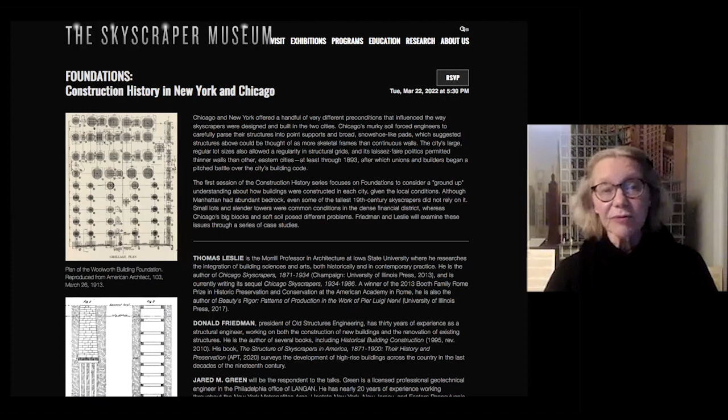Don and Tom will talk in three other sessions on, and I will show you briefly the other topics, frames, facades, fire, and then Alexander Wood will join us for a final kind of case study in this series on the Mills Building in New York, on Broad Street, a building of the 1880s that will show us in action, in the spectrum of that building's construction history, a lot about the environment of construction, the profession of construction as it was being established in the very earliest years of the skyscrapers.

So this series is really meant to be a drill down into topics that we have already, and by we, I mean both the Skyscraper Museum and Don Friedman and Tom Leslie, explored in several other sessions in the museum's history of programming. And I'm going to show you a few slides that will recall some of the genesis of this debate of New York versus Chicago, and the pairing, the kind of mutual affection that you will see in the expertise of both Don and Tom.

Now, in order to make this not just the Don and Tom show for 4 running weeks, we have invited an additional professional expert to be the moderator for the dialogue that happens after the individual city presentation. So tonight that's Jared Green, who is a geotechnical engineer in the Philadelphia office of LANGAN. I will introduce him a little more fully after Tom and Don speak. But first I want to give a little bit of an overview and an introduction to the series.

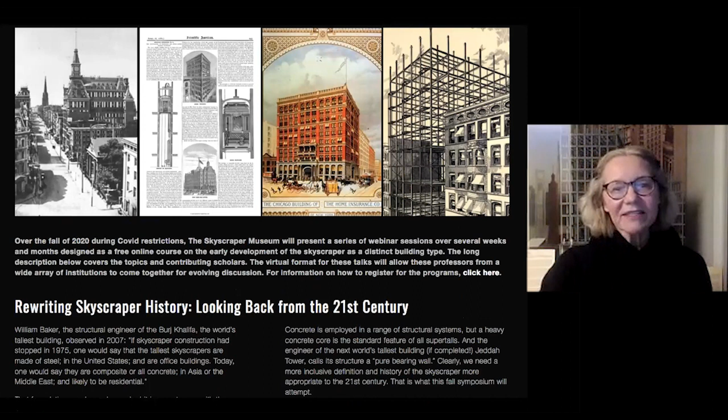And this is a continuation of some of the explorations that we did almost 2 years ago now in a kind of continuing semester symposium by contributing scholars, some of whom will return for this series, called Rewriting Skyscraper History. And that series was a response to the historiography and to the new scholarship that surrounds the skyscraper, but also to a particular lens on skyscraper history that emphasizes firsts.

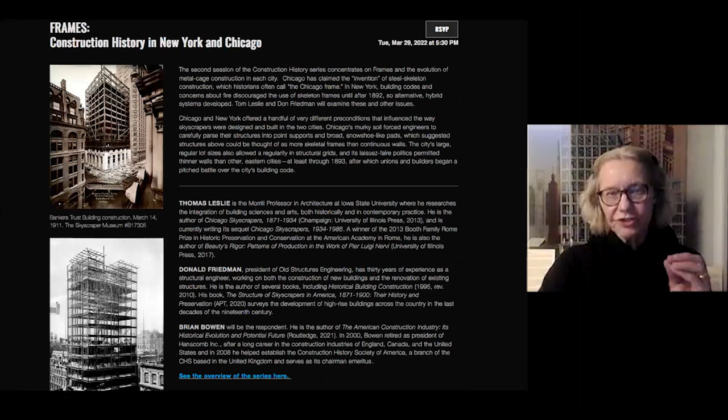I'll talk about that in a moment, but here are just a few screens that feature the first lectures in the series, moving up from foundations to frames, to separate out facades in order to talk about those. And you see at the top of the screen some of these analytical drawings that Tom Leslie has done with his students at Iowa State. And that kind of analysis Tom's going to talk about more over the course of the series.

Tom Leslie is the Morrill Professor at Iowa State University. He has a long history of teaching studio. He worked as an architect before he became a professor, and he has for many years been defining himself as a preeminent historian of the Chicago skyscraper, first with this work that takes the first tranche of the decades 1871 to 1934, and now at work in the sequel to this book, which looks in depth at the post-war period. But I'm going to represent Tom and Don just with a single cover of one of their books, although they have many more to their names, and you can find those on our website.

Donald Friedman is a structural engineer who is the head of his firm, Old Structures, here in New York, where he's practiced for about 30 years. This book, The Structure of Skyscrapers in America, is not only about New York, but he is the defender of and the deep down expert on New York architecture in our dialogue, our kind of binary between New York and Chicago. He is also the author of Historical Building Construction and numerous other works, informed both by his scholarship and by his work on historic structures in the city in his professional life.

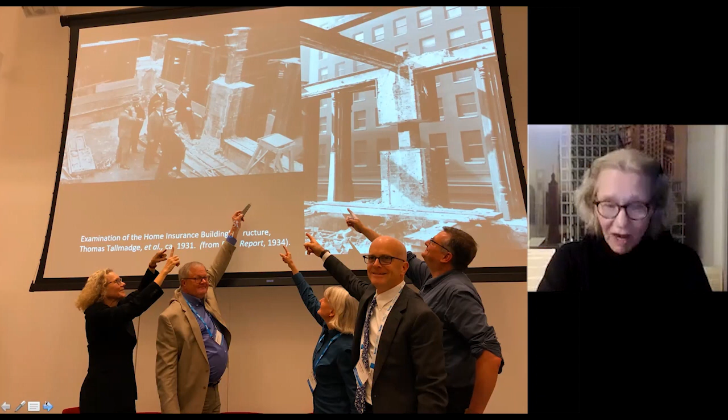These are some of the conspirator historians, with my cursor on Tom Leslie's nose, and there's Don and Gail Fenske and Jerry Larson and me putting the hex sign against the allegation that the first skyscraper was the Home Insurance Building, which was, as you can see in these slides, disproved during the demolition of the building. But it's taken a long time to erase that myth. We'll also address another myth tonight, the bedrock myth, and I think you'll understand why we object to that one as well.

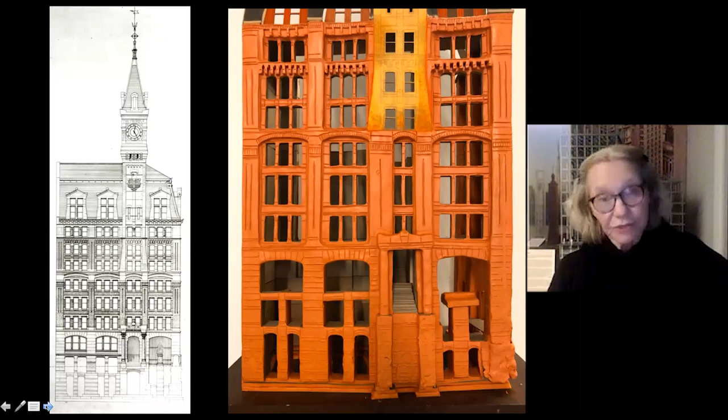So the only thing I want to say before I try to get quickly off the screen is to talk about why foundations are first. Foundations, as you see here in the model in the Skyscraper Museum that was made for one of our exhibitions, the base of Richard Morris Hunt's Tribune building of 1874, which the Skyscraper Museum believes is, along with the Western Union building, the first skyscraper, if you want to talk about very tall urban commercial buildings.

And you can see in the Hunt drawing that down here where my cursor is, the ground floor is seen on these steps, but the building begins with the first bricks and the first stone at the subterranean level, the sub level of the street with the foundations. And so that's what we're talking about tonight.

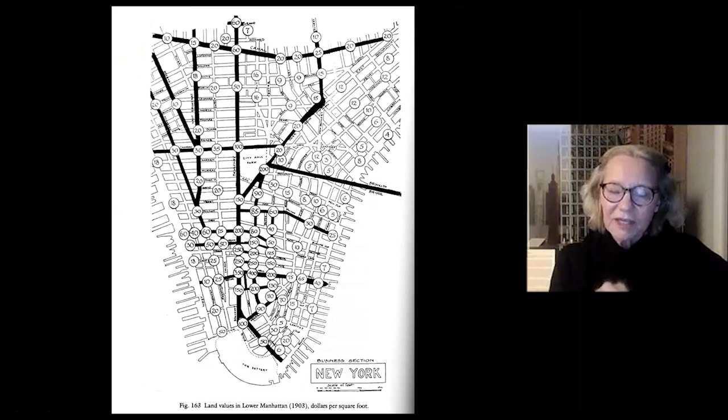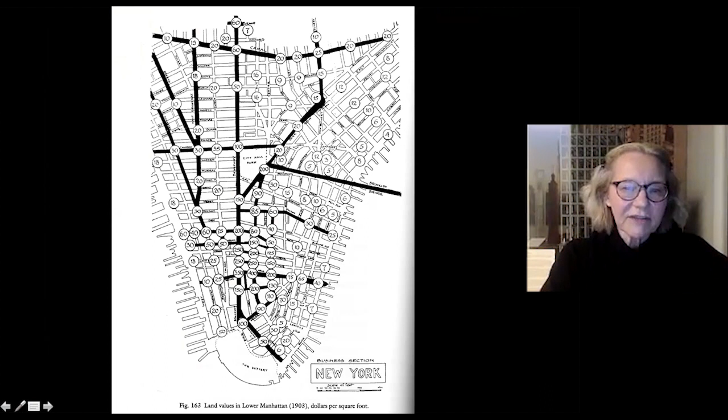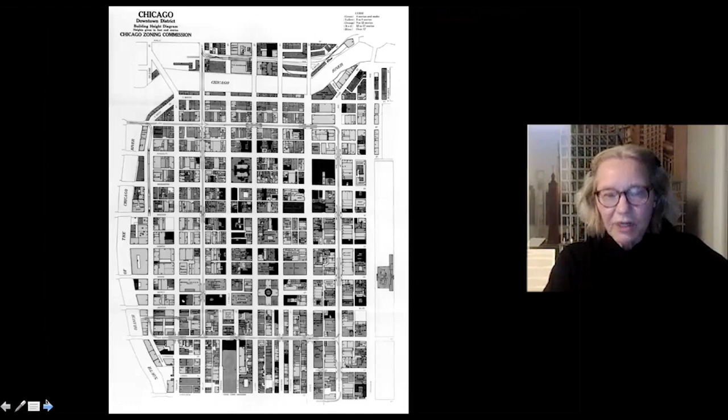We are not talking about the lens of history that I especially have advanced, especially through the museum and through my now 25-year-old book, Form Follows Finance, where the argument is that it's land and economics that determine the location and the shape of skyscrapers. We're not looking at that tonight, even though that argument can be made in a series of images that contrast the platting of the land in Chicago and in New York, Chicago's big square blocks, and the resulting forms of the buildings opened at the center in their light courts.

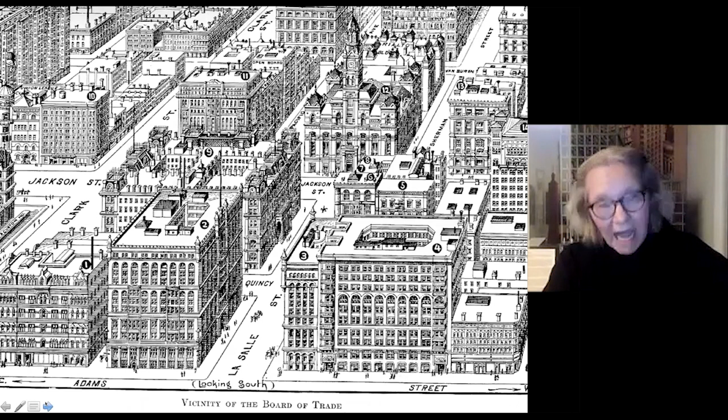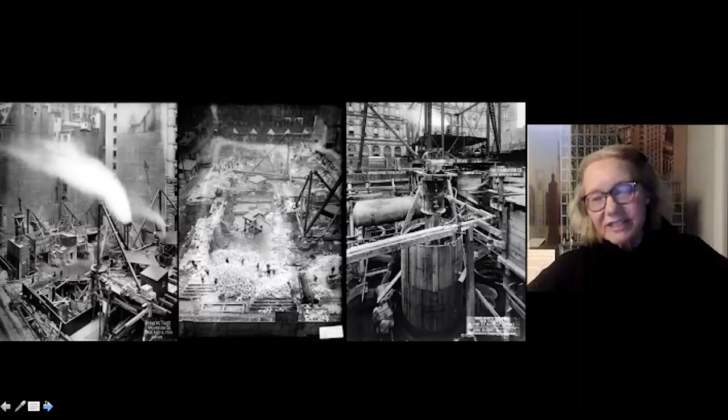But that's not what we're talking about tonight, not the difference between the typical skyline in New York and Chicago in the 1910s, but rather the difference in the sub-ground level that generates different responses by the engineers and the architects. So at this point now, I'm going to invite Tom Leslie to come onto the screen.

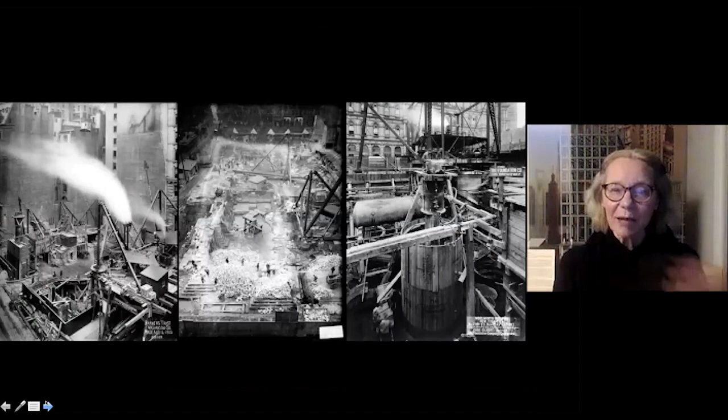The foundations are one of the things that Don and I both think draw a distinction between construction in New York and construction in Chicago. And so what I want to do tonight is to talk a little bit about the evolution of foundations, particularly in Chicago, why they evolved the way they did, and to suggest that this is one factor that influenced the difference in skyscraper construction and skyscraper massing and form between the two cities.

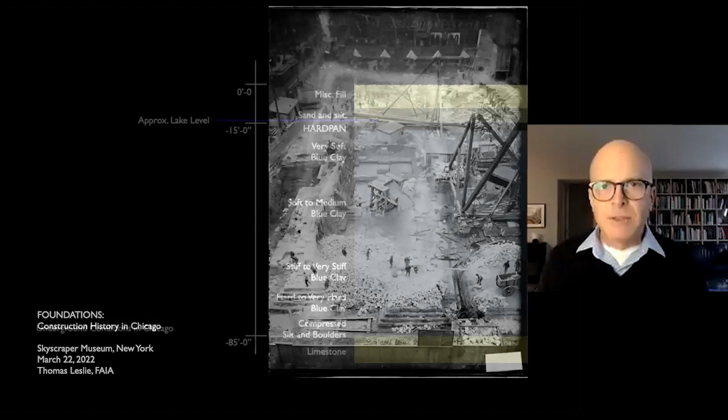One of the really defining characteristics of Chicago is that geographically, it is one of the best places in the world to build tall buildings because it's always been at the center of various trade and exchange routes. Geologically, it is probably one of the worst places in the world to build a skyscraper because, sitting at the junction of a slow-moving river and a very large lake, the soil underneath the city of Chicago is largely fluid, meaning that it's compressible, it's squishy, and it tends not to stay in one place when you put a heavy object on top of it.

The underground terrain varies throughout the Loop, but in general, there is about 15 feet of fill and sand, silt, sort of soil that tends to get scraped off. And then there's a large depth of clay that goes from very, very soft clay near the top to very, very hard clay between about 65 and 80 feet below ground level.

That clay is the result of silt accumulating at the mouth of the Chicago River and gradually settling, and the upper layers compress the lower layers until you get what is variously called tunnel clay or hard pan down at that 65 to 80 foot level.

The one sort of fortunate thing is that the geology of the soil under Lake Michigan is in part determined by the fact that the lake has risen and fallen over the years. And there is this very, very thin layer of desiccated or dried clay called hard pan that's about 15 or 20 feet below the original ground level. That is really the only stratum anywhere near the surface that you can put any weight at all on.

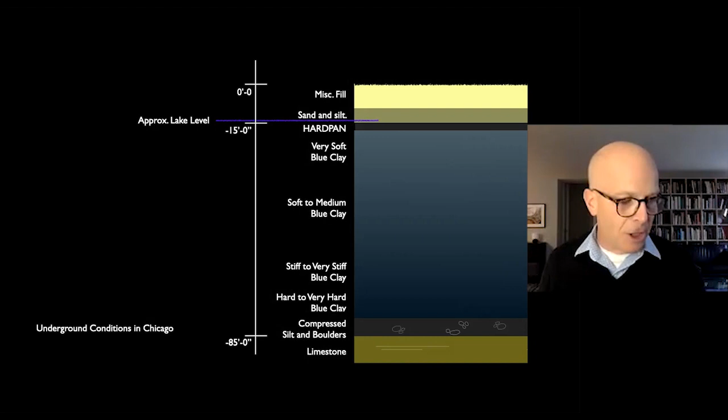And so for many years, the way that you built the buildings in commercial Chicago, 5, 6, 7 stories, was either to build what's called a mat foundation, so just a very, very large, thick layer of concrete and rubble down at the hard pan level, resting directly on it. This is an ancient technique. The Colosseum in Rome sits on a 24-foot thick concrete mat foundation. That's the way that you build a giant heavy stadium on a swamp.

The other way that was used largely for structures on the river itself was piling. And piling works in two ways. Today, we're very confident building what are called friction piles, which rely on the fluid pressure of the soil around them to build up resistance. If you think about trying to pound a broomstick into the beach, eventually you can't go any further because the grip of the sand around the stick becomes too great.

But in the 19th century especially, that wasn't seen as reliable. And so what was often done was piles were built down to the harder strata well below the surface. So down to the lower clay levels or down to that lower hard pan layer of boulders and really compressed clay. The problem with this is that it is hard to get 70-foot long timbers, possible but expensive. And so often the solution was to drive one set of piles and then to put another set of piles on top of them and drive those and sort of hope that the piles stayed aligned as they went down.

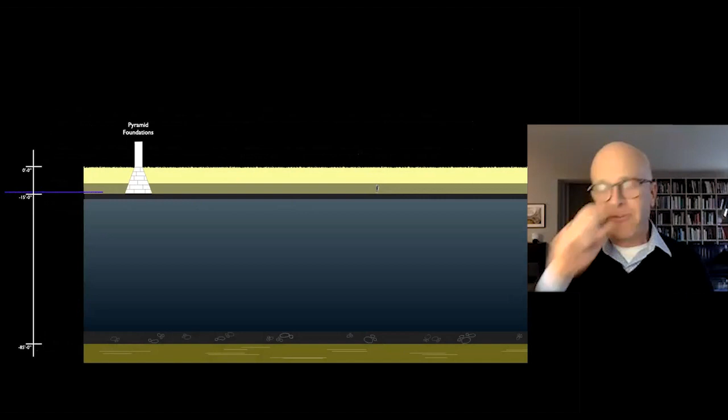But the sort of genius of this was that you could, in fact, by, for instance, piling stone in pyramids that would mediate between the size of the pier above and the area of soil or hardpan that you need to spread the load out on top of. You could do that relatively easily if you knew the loads and if you knew the strength of the soil. And so initially, these pyramidal foundations were reasonably successful in spreading these loads out.

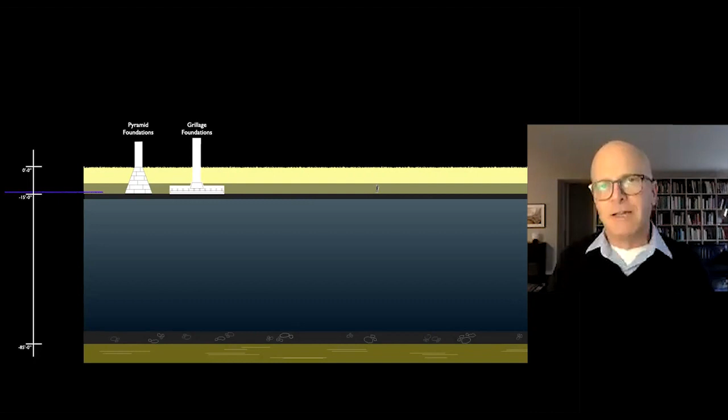And eventually we got what were called grillage foundations. Engineers realized that the bending capacity of first railroad iron and then eventually steel I-beams could be used to create much more efficient foundations and to open up more basement space below.

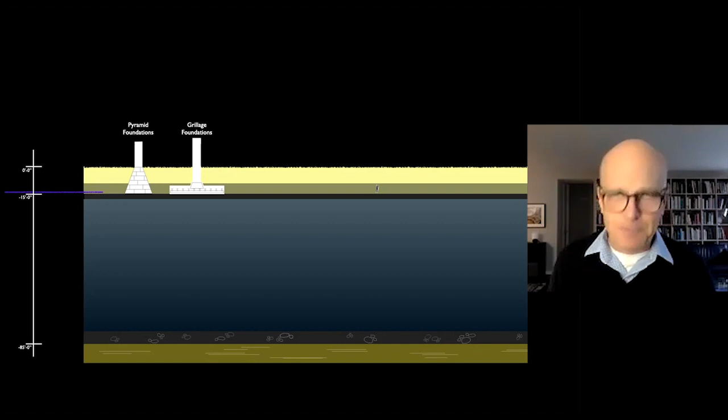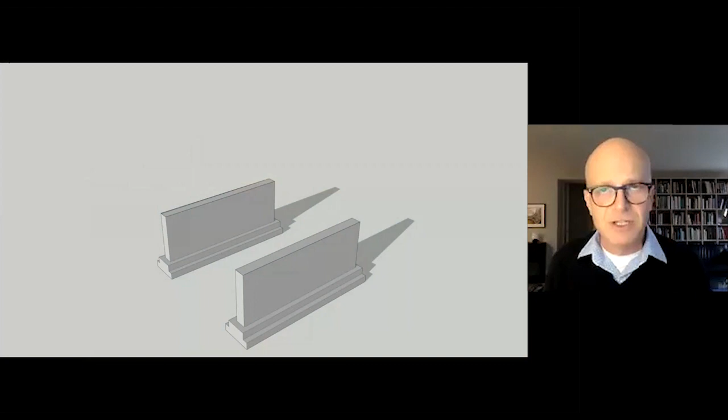Now, I have a kind of theory about this, which says that if you start thinking about your building in terms of isolated foundations instead of walls, you get something that we think of as a very natural Chicago response, the skeleton frame. And the argument goes something like this, that in cities where it is easy to get to a very strong foundation soil like bedrock, you're very naturally going to think about the perimeter of your building as a set of bearing foundations that might be a little wider, that'll have a spread at the bottom, mostly for stability.

But as soon as you think about your foundations as walls, then I think you start to think about the exterior of your building as walls, and that the windows in them are kind of punched into something that starts out as a structural element that's a plane. You may use iron and steel beams and girders to span between these walls, but essentially if you have easy foundations, you're likely to think about two-dimensional solutions and therefore to extrude that up into your building itself.

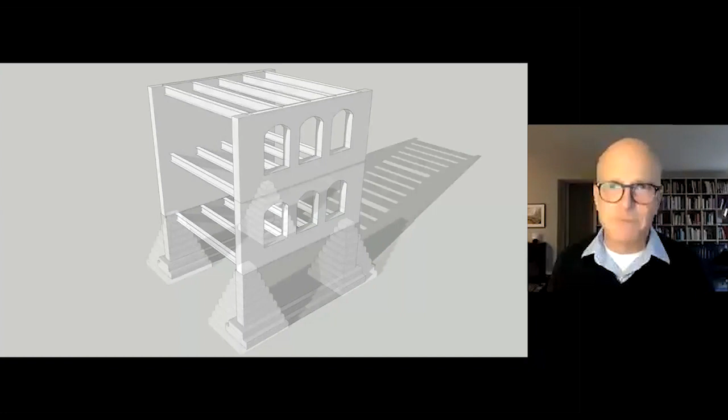In Chicago, if you're following Baumann's prescription that you are resolving all the loads into points, then I think you're thinking about your building more in terms of linear elements, in terms of piers or columns that come up from these pyramidal bases that you see here. And then you're thinking not about building walls above, but you're thinking about connecting those vertical elements, those linear elements, with steel girders, steel beams, wrought iron girders and beams at first, of course. And then just filling in what you need to between those piers.

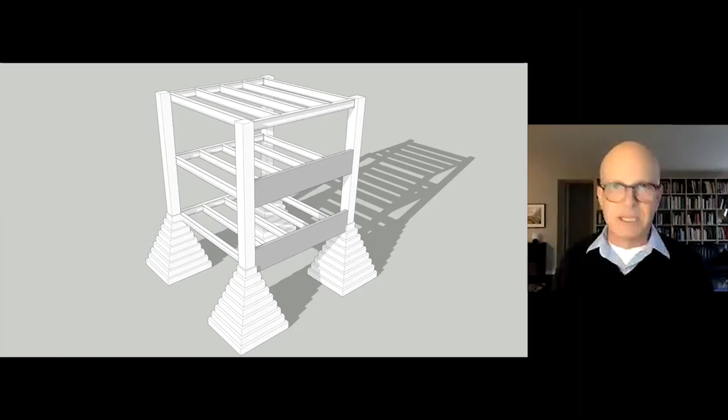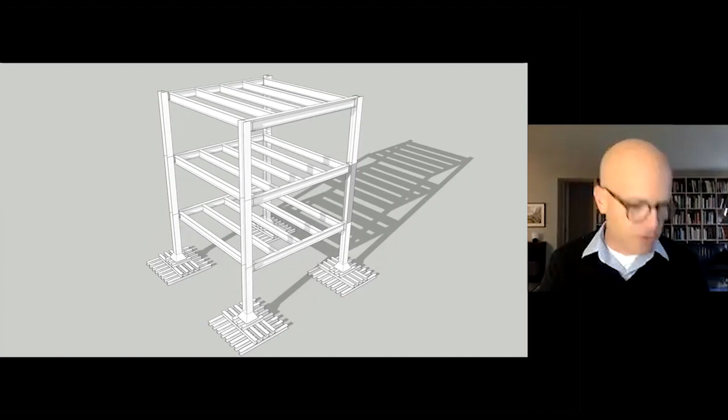So we see the rise of the spandrel, right? Just enough solid on the outside to keep people from falling out of windows, but not thinking about the exterior necessarily as a solid wall to begin with. And as you think about grillage foundations in particular, when steel becomes available, my hunch is that you think about the entire building not now as a network of walls and beams, but rather as a network of skeletal elements, right? Coming up from the kind of lily pads or snowshoes that form the foundations and making a recognizable structural grid.

There's a lightweight timber framed turret on the edge, but that is not something that you typically see. And I think there's a good reason for that, right? That spread footings imply that you want to keep the building more or less simple. Spread footings are relatively popular throughout the 1880s.

They are reasonably successful. William LeBaron Jenney, when he writes about the Home Insurance Building, doesn't title his essay "The World's First Skeleton Frame." He titles it "A Tall, Fireproof, Heavy Building on Compressible Soil." And most of his self-reporting about the Home Insurance is not about the structural innovations above, but rather most of the article is actually about how he calculated the spread foundations down below in the soil itself.

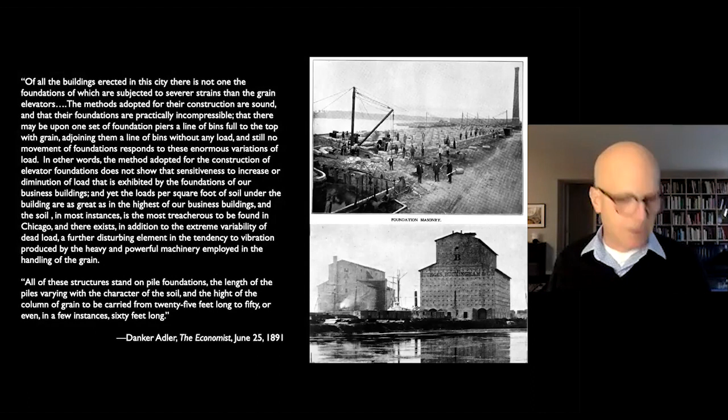So beginning in 1891, Adler starts to campaign, along with others, for a better, more reliable solution than spread footings. He points out that the grain elevators sat on friction piles that didn't necessarily go all the way to the lower hardpan strata. But he also uses piles that go down all the way to this more robust stratum well below the ground level. And the Garrick Theater, the Schiller Building, which he and Sullivan do in 1892, actually uses piles that go down to what he calls tunnel clay, the lower stratum of the compressible blue clay.

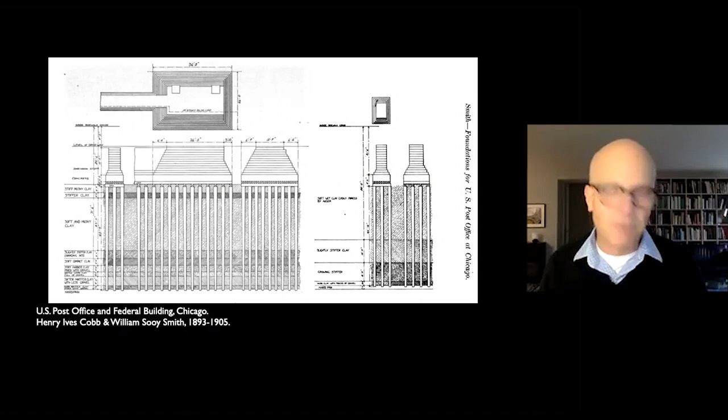William Sooy Smith, who is a civil engineer with, like Jenney, a Civil War pedigree, specializes in tunnel construction, and he designs the pile foundations that go under the post office's replacement. The building eventually finished in 1905 by Henry Ives Cobb, where the Metcalfe post office is now. The pile foundations are successful. They are probably the only good part of this building. It's technically one of the worst buildings probably ever built in Chicago, but it is not one that is subjected to differential settlement. And Sooy Smith learns from this, understands that piles represent a way to get past the differential settlement problems that come with spread footings.

Now, Sooy Smith is a tunnel engineer by training, and he's a great example of when the tool you have is a hammer, every problem becomes a nail. When he works on a quick renovation a couple of years after the Chicago Library is built, he comes up with this idea to mitigate the problems of obtaining long piles and to make sure that those piles are always embedded in wet soil. He's worried that all of the drainage projects in the Loop are going to lower the water table, something that has not actually happened. Timber is vulnerable to rot when it dries out and gets wet again. And so Sooy Smith is obsessed with the idea of keeping timber piles below the water table.

And he comes up with this idea of making deep piles by first excavating deep basements, large trenches, so that you're starting to drive the piles at 15, 20, 30 feet below ground level. This is what they do for the library. Sooy Smith notes that the clay, while it's compressible and fluid, is not so fluid that you have to actually keep the water out. You can use simple lagging to keep most of the clay from infiltrating the trenches. And he says, once you're done with the piles, you can build masonry walls that form the bottom of a reasonably good structure. And he actually says you could imagine digging those trenches all the way down to bedrock. The lagging would work, of course, as you get through the stiffer and stiffer clay.

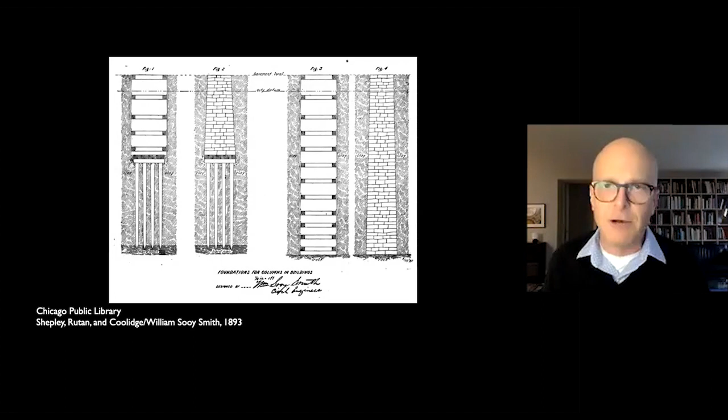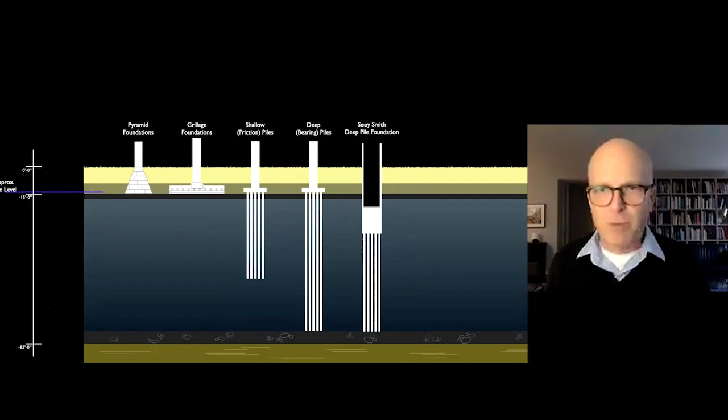And he says you could actually put masonry piers that go all the way down to the better stratum below. So the solution that Sooy Smith has for deep bearing piles is to first dig a big trench, then drive the piles, and then build the masonry foundation above it.

And this leads very quickly to Adler's realization that you might as well dispense with piles altogether. And since it's possible to simply dig the well all the way down to hardpan or to bedrock, you might as well just use the lagging and dig those wells and just fill that with rubble, concrete, masonry, whatever. And so we get the birth of what becomes called the Chicago caisson.

This is not a pneumatic caisson, a caisson in the traditional bridge building sense, because there's no forced air or pressurized air trying to keep the water out. Instead, it is more of an open well foundation, right? That they dig or drill a well and then fill that with masonry or concrete.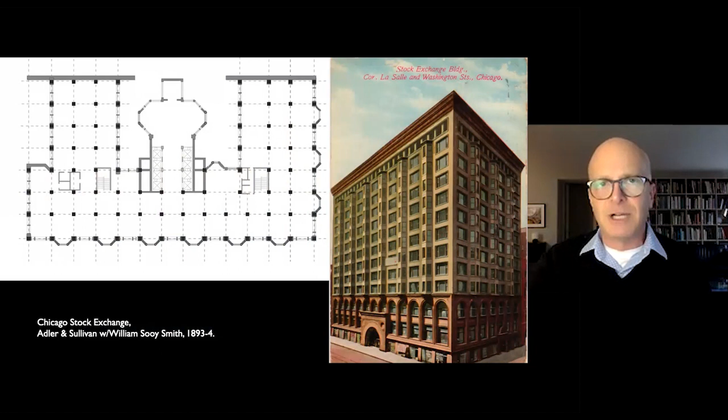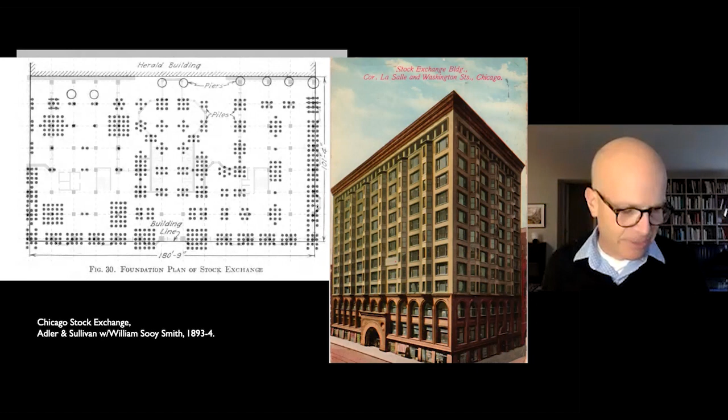Adler is worried, based on his experience with the Garrick Theater, that all of this pile driving can damage neighboring buildings. There's a particularly fragile building next door to the Stock Exchange. And so to protect it, Adler and Sooy Smith designed these open well caissons along the western wall of the Stock Exchange. So they're digging instead of pounding, and the Herald building doesn't actually collapse or fall down because of all of the vibrations from the piles.

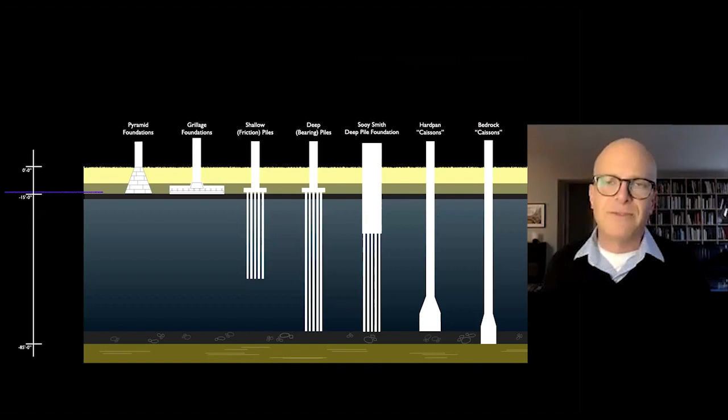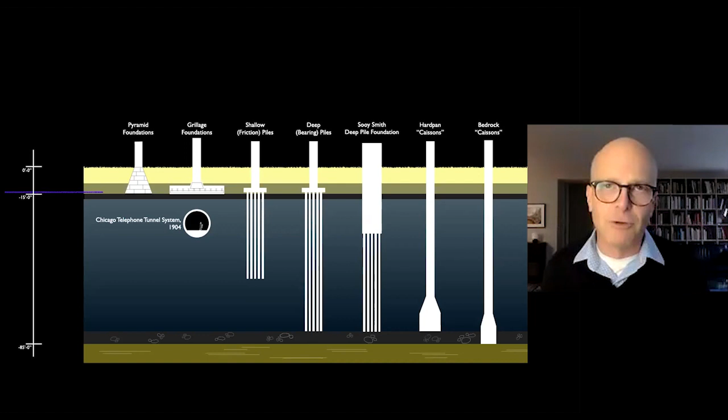Now, the caissons become very, very popular after 1900. They are, of course, labor intensive to build. They have all of the problems associated with deep excavations, but they become necessary because in 1904, the Chicago telephone tunnel system gets installed throughout the Loop below the hardpan level, and therefore it is seen as vulnerable to new spread foundation constructions. And there are no spread foundations basically built on that upper hardpan layer after 1904-05.

I think that the caissons actually usher in an era of slightly different construction in Chicago. You can see as early as 1911, very tall buildings with light courts where the loads on the foundation are very, very different from the taller portion of the building to the light court portion of the building. This is something that, of course, the light court has been in use since the 1880s, but here you have buildings that are 2 or 3 times as tall as those earlier ones, on caissons that go all the way down to bedrock.

More perhaps obvious are the tower, or the block-and-tower, or the streamlined Art Deco skyscrapers of the 1920s. The caisson foundations are necessary but not sufficient to explain the variety of massing there. And because the caissons in Chicago are much more similar to the sorts of foundations that Don is going to talk about here in a second, there's at least one reason that buildings of the 1920s in Chicago begin to look in their massing and configuration a bit more like buildings in New York.

So I will leave it there, and I think we will go to Don now for the equivalent in New York City, and hopefully then come back and be able to do some comparison between these two histories.

Thank you, Tom. Let me get my slides up here. Yeah. Okay. Yes.

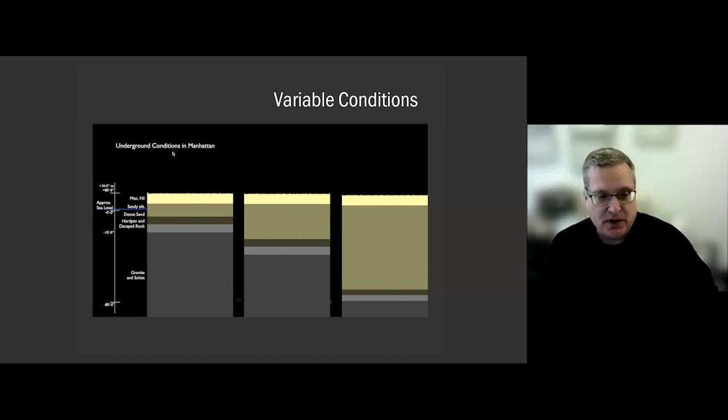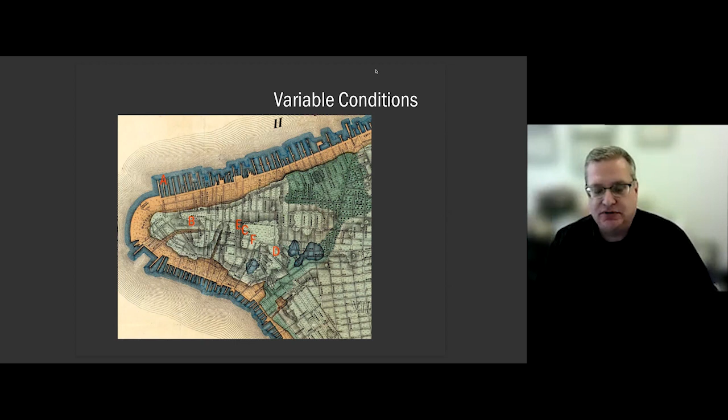One of my slides later is going to show an inverted arch foundation, which was a very clever idea that people had mostly in the third quarter of the 19th century. It's a clever and terrible idea because it doesn't really work properly, but it was used again and again because people thought it was a way to deal with the increasing loads as buildings got bigger and bigger. Where good bearing material was relatively close to the surface, people continued to just build masonry foundations on top of that bearing material. In short, if there was not a reason to do something else, they didn't do something else.

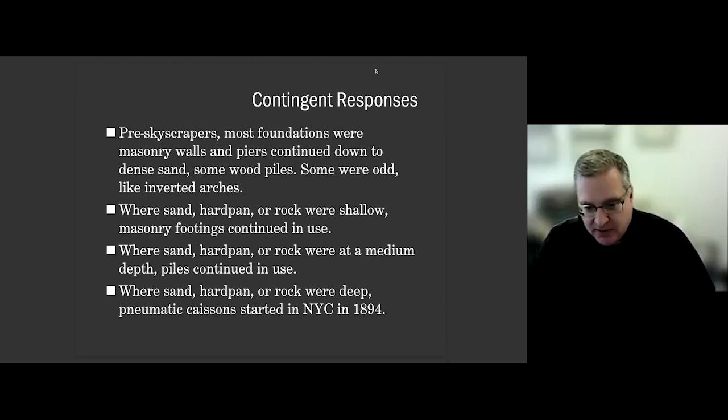Piles and wood piles up until 1900, and then around 1900, various forms of precast concrete pile enter use, were used where good material was sort of at a medium distance, where you didn't have the problem that Tom was talking about of needing to get very deep, very long piles to very deep bearing.

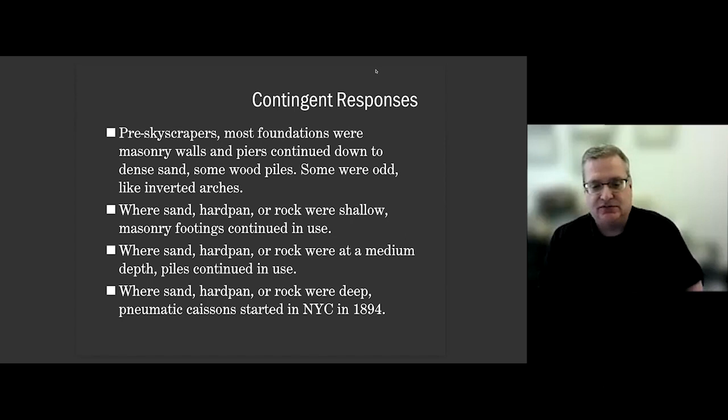And then we have used open caissons, such as Tom has described in New York. They're used today. But when people were talking about caissons in New York in the early skyscraper days, what they meant were pneumatic caissons. And I'll have a slide that shows what that is in reasonably good detail. Let's get on to the more interesting pictures of buildings.

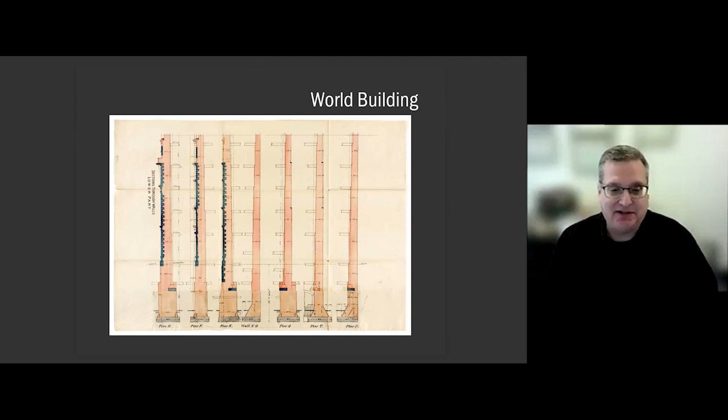So the World building, let me start with this one. This was on Park Row and Frankfort Street, and Frankfort Street no longer exists. Like the World building, it was pretty much wiped out for extension of the approaches to the Brooklyn Bridge. This was the tallest building in the world from 1890 to 1894, so fleeting fame.

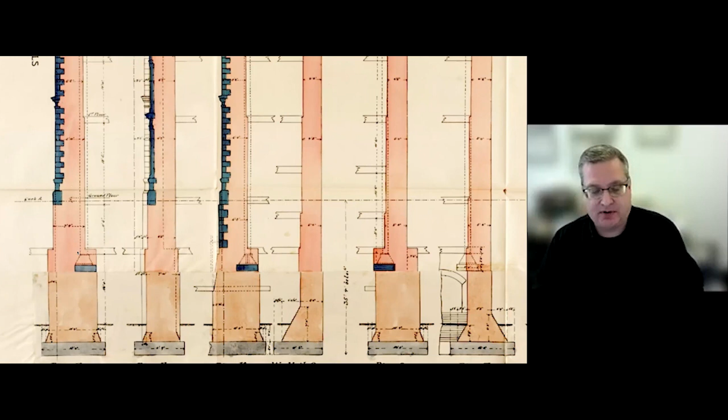And as you can see, the reddish, orangish, pinkish color is meant to be brick. The blue is stone, and that's mostly used as facing. And the gray is also stone. I believe that may be rubble. And each of these masonry piers for this very tall building, a 310-foot tall building, come down and we simply have a spread footing and it rests on the bearing stratum at the bottom. In between wall N-O and pier Q down at the bottom, you can see it's 35 feet from grade down to the foundation bottom level.

The World building was not a skeleton frame. It was not a bearing wall building. It was a combination of the two. And if you see those streaks of blue representing granite that are sort of below the second floor from grade, those are bases for cast iron columns that are running up through the building. And what they're bearing on is the huge brick pier foundation below. So the heavy masonry bears on, I don't think it's on rock, I think it's on hardpan. And then the cast iron columns are simply bearing on the masonry. So this is very much a hybrid type of situation.

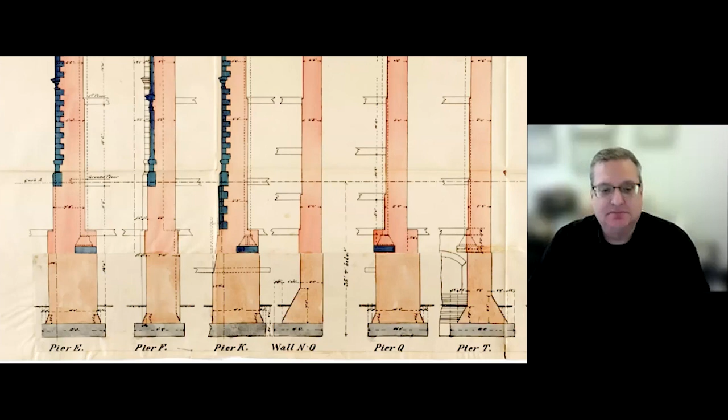And again, at wall N-O, you can see, as Tom was talking about, the pyramids, and at pier T as well, you can see the way that the brick splays out to spread out the load. So this is that idea of spreading out the load to get an equal pressure below each pier. And I want to come back to that actually with the next slide, I think. So this is a section through the World building.

The problem with it is that the loads aren't going to be exactly the same from column to column. And if you try to make a true arch work with different reactions at the bottom, the arch deforms, but these arches can't deform because they're trapped on top of the soil. You end up with very different pressure under different columns with this kind of foundation, which is not the end of the world. And this building did not have any significant foundation failure, but it didn't work the way it was supposed to. And that's probably the worst thing an engineer can say about a form of structure. If it's not working the way it's supposed to, you can't be sure it's going to work properly when you need it to do so.

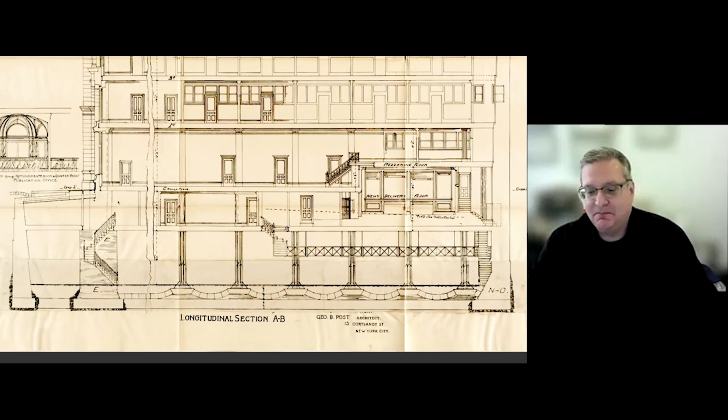So this almost follows Baumann's idea of having isolated separate foundations to equalize the soil pressure. Had they not used the inverted arches, they could have actually got there. But they did what they did.

Now we get to the difference between the word caisson in New York and Chicago. So the Manhattan Life building was at 66 Broadway. This was also the tallest building in the world briefly, 1894 to 1899. Just to give you a sense, the tallest building in the world at 348 feet. The tallest occupied building at 348 feet.

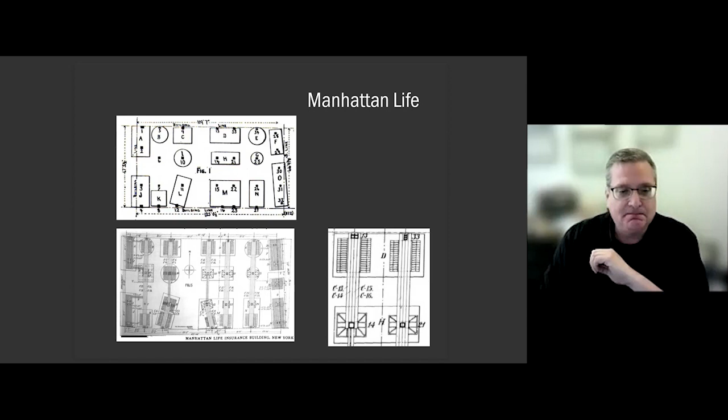I want to go through each of these plans separately because they show different things. So this is the entire floor plan of the building. It was not very big, 66 feet wide north to south on the east end, 67 feet on the west end, and 120, 125 feet deep. So it's not a big building. As Carol was talking about, New York tends to have fragmented lots.

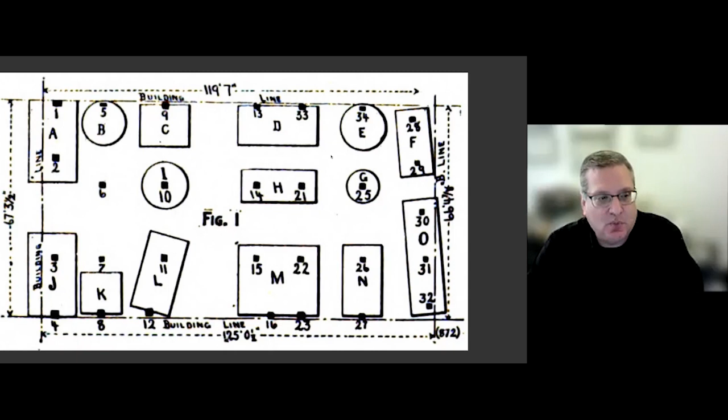This plan represents the caissons that were used to support the columns. Every place you see a number, that's a column. So on the upper left, we have column 1 and 2, lower left, we have column 3, and so on. And there are 32 columns in the entire building, and all but 2 of them are directly supported on caissons.

And I want to get to the issue of how do you deal with columns that are right up against the lot line, because this was a continual problem in New York on the vast majority of buildings. Columns 6 and 7 are not on caissons, and I will show a picture of how they were supported. As you can see, the caissons are all over the place. They're different shapes, different sizes, different orientations.

In part, the different orientation is because New Street, which is on the far right, is not parallel to Broadway on the far left. But that explains why caisson F and caisson O are not vertical, but doesn't explain, for example, why caisson L is the way it is. And the short answer for this very wide variety of caissons is that the building frame was not as regular as it might have been, because there were other considerations. Some of them were architectural.

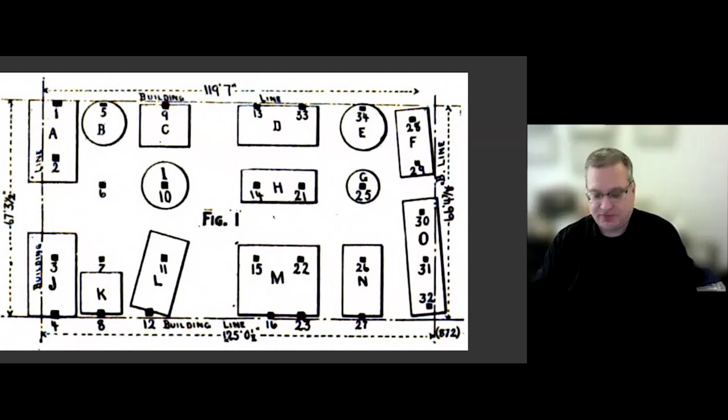In between columns 2 and 3 on the left was the grand entrance to the building, and therefore there are no columns there. Some of them have to do with the neighboring buildings. I believe column 12 at the bottom of the drawing was moved because of a condition involving, as Tom described in Chicago, a delicate neighboring building. So this doesn't tell us very much other than where the caissons were.

This is what went on top of the caissons. And again, I am going to come back to the caissons themselves in a minute, but this is what went on top of them. And all of the things you're seeing here are steel. So if we look at, on the upper right, columns 28 and 29, they rest on top of a series of beams running more or less east-west, and those beams rest on top of a much longer series of beams running more or less north-south.

That's the steel grillage, and that is spreading out the load from the columns so that it is uniformly distributed over the caisson itself. This was being used because the short version is they didn't have reinforced concrete. So rather than worrying about concrete strength, they simply used steel, which they were very comfortable with, to spread out the loads. That's what a grillage is. It's using steel to spread the load over a given area to reduce the load intensity.

Columns 6 and 7 don't rest on caissons. If you look at the left-hand side, column 7 is resting on a series of girders that span from caisson K up to where column 6 is. Column 6, and I don't know the reason for this, I would love to find out, is the only column that does not rest on a caisson, it rests on a pile cap. In other words, you can see those round lines around where column 6 is. They drove piles for one column.

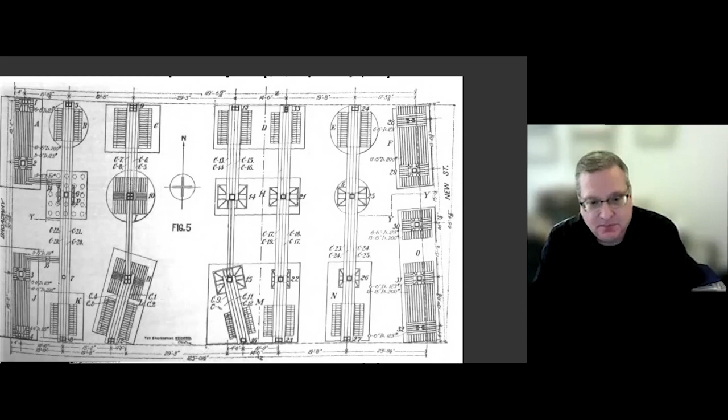We have a series of grillages sitting on top of the caissons. In the middle of the drawing, at caisson H, column 14 and 21, you see that funny looking thing that doesn't look like a grillage. That is a big cast iron base, also used to spread out the load. Most likely the reason that the cast iron was used there rather than the grillage is that the load on those columns was smaller and did not need as much support.

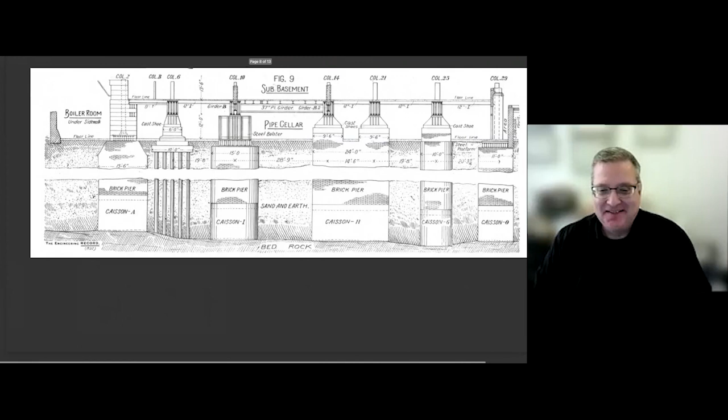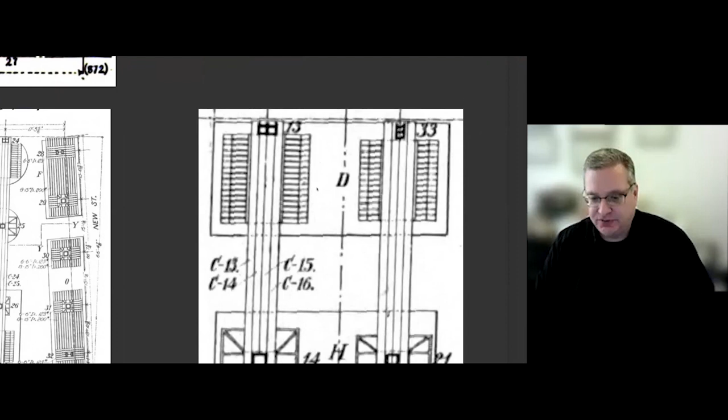Here's a blow up. Whoa, I did not mean to do that. Okay, here is a blow up of the grillage. So again, C13, C14, C15, C16 are 4 steel beams that are spanning across. If you look up at caisson D, every one of those rectangles that is underneath those 4 beams represents another beam at right angles to it. So that is the grillage.

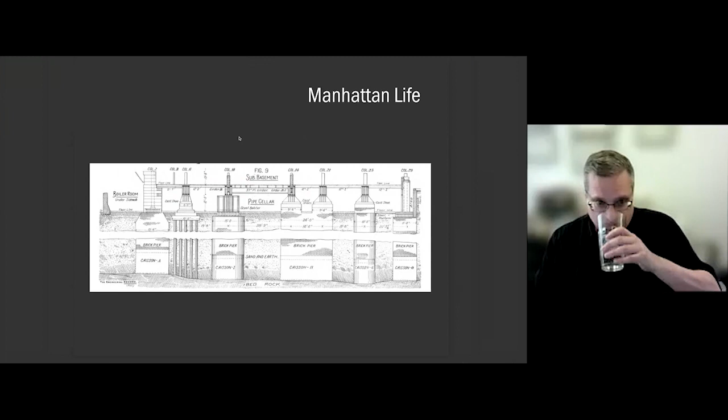I believe not in my slides, but in some of Carol's slides, we have a very nice photograph of a grillage. This is a section through the entire building. There's column 6 and its piles towards the left, where it says boiler room under sidewalk. So that's a sidewalk vault below Broadway. And then there are the caissons down at bedrock, caisson A, caisson I, caisson H, and so on.

So some of you may know this, but just to go through it, what actually is a pneumatic caisson? Manhattan Life was the first building that these were used for in the United States. They were basically big boxes without a bottom. So picture a box has a top, it has 4 sides, it does not have a bottom. You rest it on top of the ground. You put workers inside, and they start digging, and they undermine the box. And as they undermine it, it sinks down into the ground.

You then build on top of it, and as you can see, they were building brick piers on top of it. So while you have laborers inside the box removing earth, you have another group on top of the box building a brick pier. And obviously, as the box gets deeper and deeper, the men building the pier stay at the same elevation. They're right about at the cellar elevation.

They're called pneumatic caissons because sooner or later groundwater is going to start to seep in, and in order to keep the groundwater out so that people can stay inside and keep digging, you fill up the box with compressed air. This technique was not developed for building foundations. It was developed for building mid-river piers for bridges. The first use in the United States was a small bridge, and I forget where it was. It was a very small caisson.

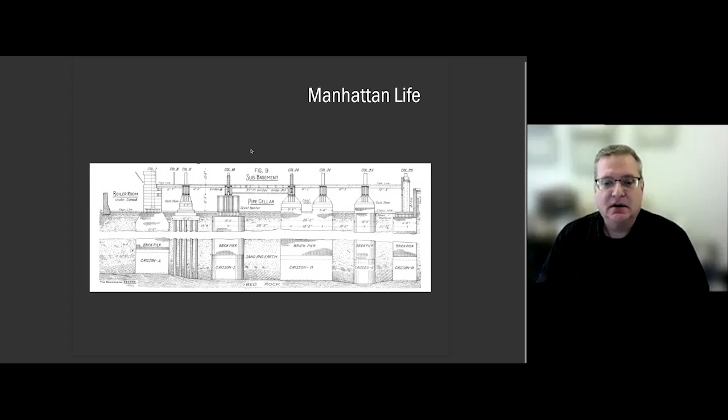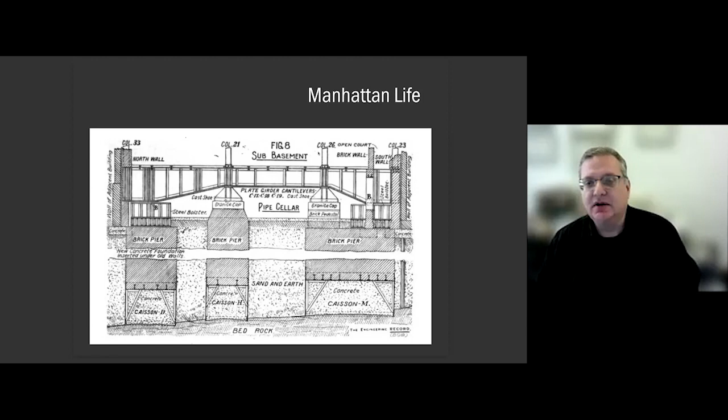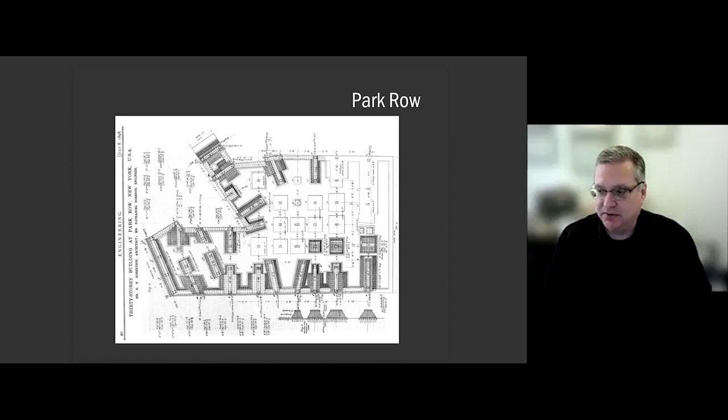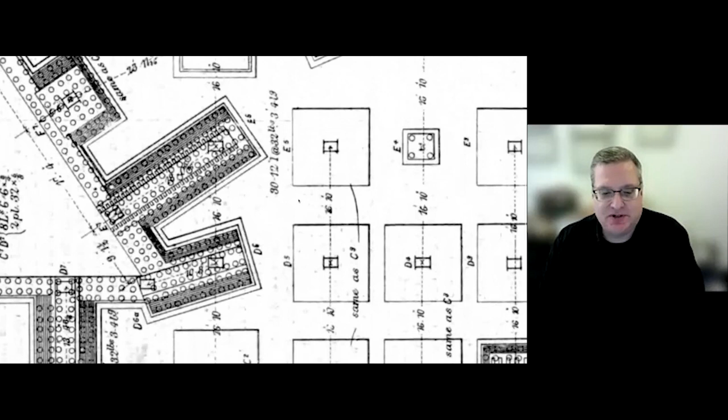This is an almost 400-foot tall building, 390 or so, built on wood piles. So let me zoom in. Every one of those little circles represents a wood pile driven into the ground. Somebody took pity on the draftsman and didn't make him draw in the piles under every single piece of it. So for example, just to the right here where we have these white squares, those are pile caps as well. They just didn't draw it all in. Here's one of the pile caps where they did draw it in.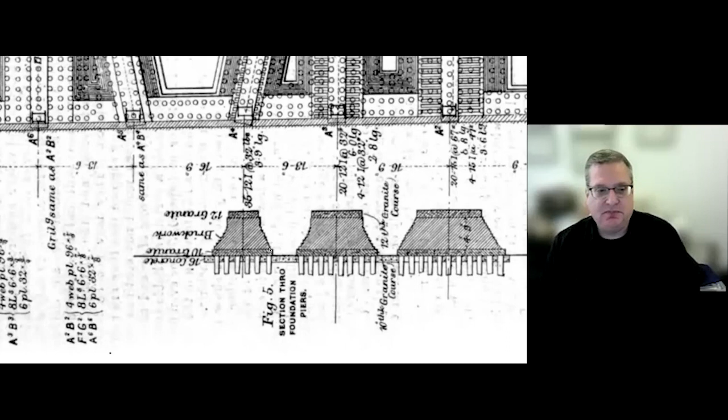But if we go down to the bottom of this drawing, we have a section. And here you can see there are wood piles. And then there is a granite, we can call it a pile cap, we can call it whatever you want, a layer of granite directly on top of those wood piles, and then a brick pyramid, and then another layer of granite. And what went on top of the top layer of granite was a steel grillage. So you've got a very modern steel structure sitting on top of masonry, some of which is brick, sitting on top of wood piles. This building is now 120 plus years old, no foundation problems. These foundations are functioning just fine. They just look very odd to us.

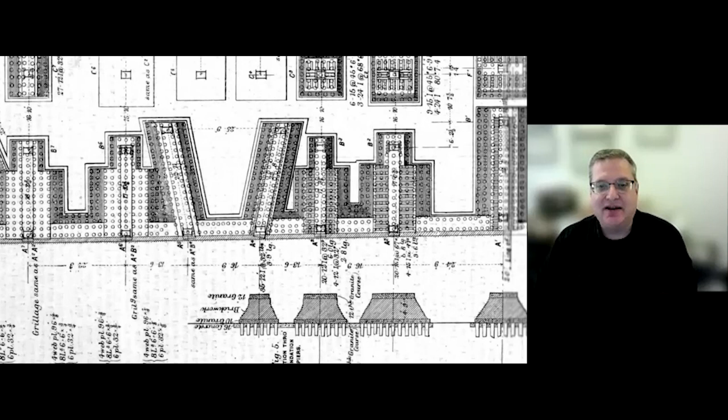Back to the plan here, you can see the outline of the columns, those rectangles that are along the bottom. Those are the steel columns going up. And you've got, again, these funny looking diagonals and sort of a V here. There's a column at each end, and then you've got a masonry pile cap connecting them. And there's again a steel grillage that runs the full length of that. So I think this is a good example of something that was not likely to be built in Chicago, in part because it would be a mistake, but that worked just fine.

The soil at the Park Row building is better than the soil at Manhattan Life. It's dense sand, and the piles were driven to refusal, which Tom described very nicely earlier. He was talking about trying to drive a broomstick into the beach. You get to the point where you can't make it move anymore, that is refusal. So when you're pounding on a pile and it doesn't keep moving down, you've reached the point where you can stop.

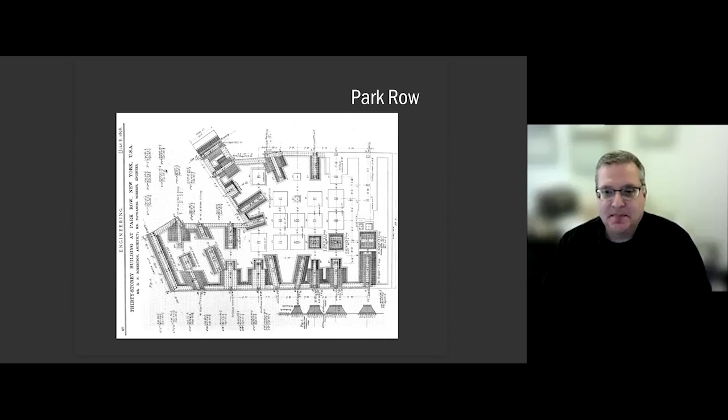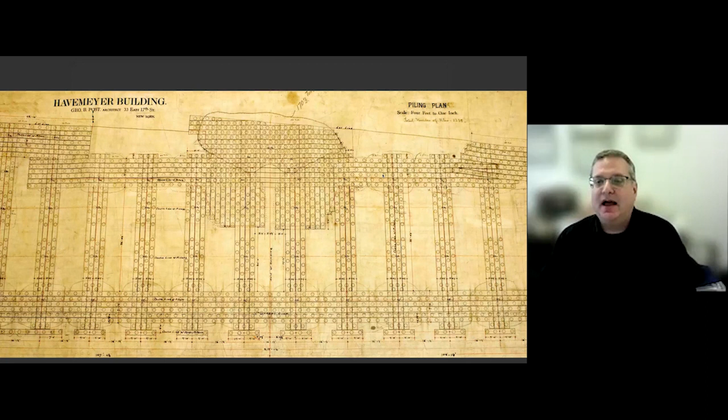Just another example, the Havemeyer building is a little out of my general description. It's a little bit shorter than the other ones. It's 1891, but this is the pile plan and pile cap plan for the building. And where it says piling plan 4 feet to 1 inch on the right there, just below that, someone has written in by hand, total number of piles, 2,238. And they are every one of them on this drawing. And it says center line of pillars, meaning the steel columns.

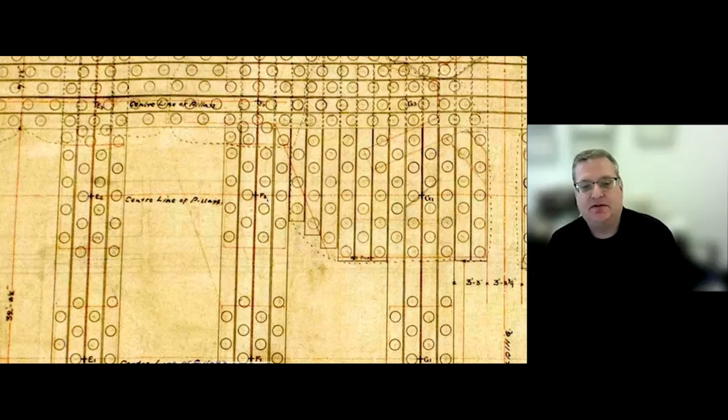So there's column E2 to the left of where it says center line of pillars, column F2 to the right of it. This all looks actually sort of modern. This is what we do, except that we no longer do it on top of wood piles. But again, this worked just fine.

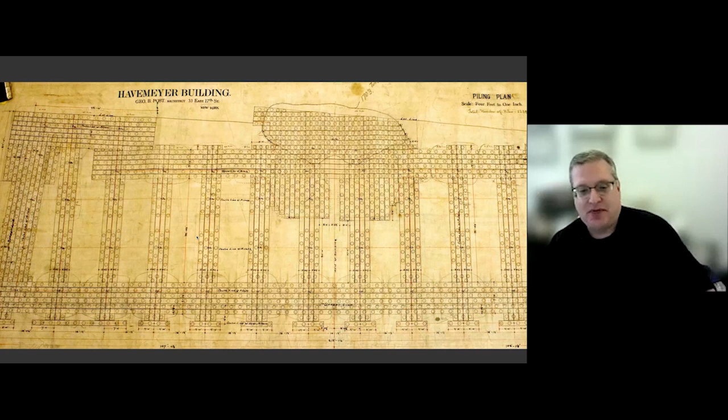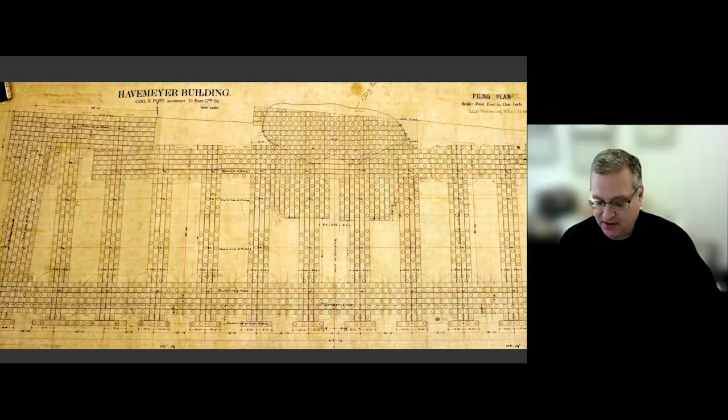What's interesting about this is that those piles were being driven very near the 6th Avenue elevated trains. And these days, if anyone in the audience has tried to work on new foundations adjacent to a subway line, there are a lot of regulations about the loads you can put on subway structures and the vibration you can cause. I suspect that these 2,000 plus piles were driven, and anybody who happened to be on the elevated as it drove past felt it. But that's sort of a side issue.

Somewhat newer building. The municipal building was completed in 1913. Real construction started around 1910. It has two wings with, at the base, Chambers Street running in between them. The building is over Chambers Street, and that portion of the street is now blocked to traffic, but it's still open to pedestrians.

This was meant to be a building supported on caissons to rock. It was known that the soil was not very good at this particular location. And this is about 2 blocks from Park Row, which was on good enough material to use piles. And in this location, it was known early on they were going to have to use caissons to rock.

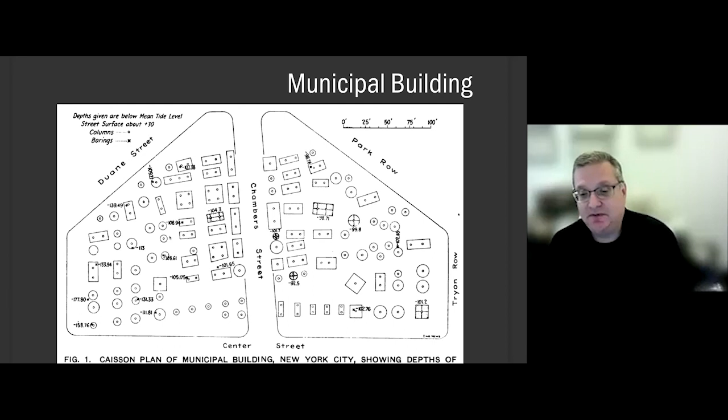So on this plan, north is to the left. The problem came at the north wing, and if you look just above where it says Figure 1, you have the elevations of bedrock. And bedrock at minus 158 feet, minus 177 feet, minus 177 feet from sea level, which is to say more than 200 feet below grade. That is a very, very long way to drive a caisson. The solution was that all the caissons didn't go to rock.

And this is a nice section because it shows you a couple of the issues involved here. The line that starts at minus 100 on the far right and then goes off to the left and dives down to the lower left corner, that's the height of bedrock. You see at the top the street surface, and then they excavated, it says about 32 feet, for the 2 cellars of the building.

And then groundwater, so mean tide level, in other words, sea level, we'll call it. The groundwater is about 6 feet below that, and then you have, from that point, some 70 feet down to bedrock on the south wing, but on the north wing, it varies tremendously. And the decision was made that since the material on top of bedrock was good, compact sand, the caissons could sit on that rather than extending down to rock.

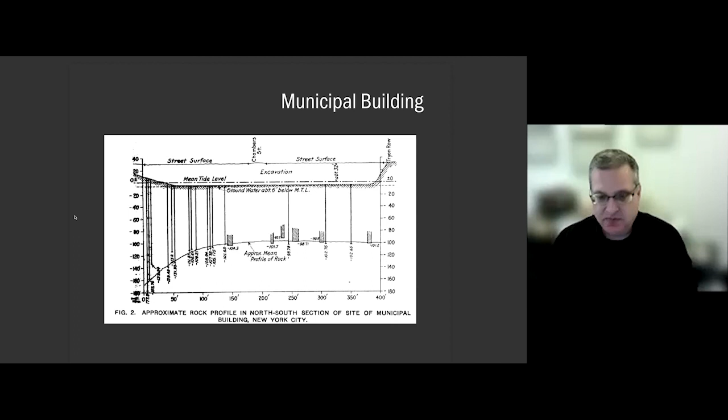So the municipal building has sort of the interesting foundation that the whole building is on caissons. And let me just come back here. All of those circles and squares and rectangles represent caissons. But half of them go to rock and half of them don't. So I was talking before about contingent solutions. I think this is about as clear an example of that as you can come up with.

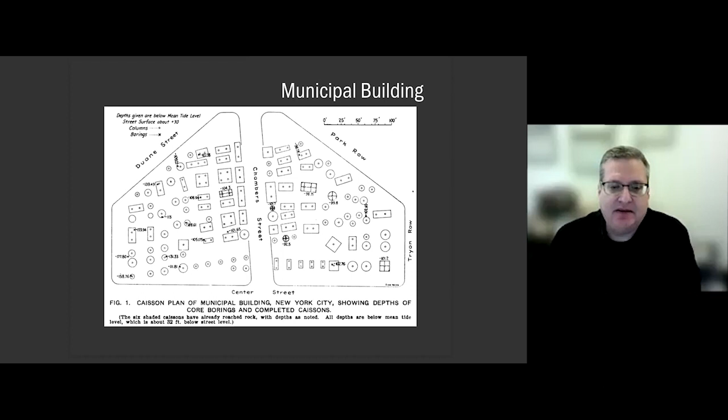One last thing I just wanted to mention, and actually let me go back to here. Obviously, the load varies as you go across the building here. Columns 33, 21, 26, and 23 do not have the same load. The ends of the big plate girder are supporting the side walls, which is a load that doesn't exist at the middle. Each column has a separate load and is carrying a separate amount.

That you can easily do that if you have foundations to rock. In Tom's slide of the Chicago Stock Exchange, and maybe he can put that back up for a second later on, Chicago, in part as a reaction to the fire of 1871, had a very strict rule about firewalls at the rear lot lines of buildings. And in the Chicago Stock Exchange building, the street-facing walls and the court-facing walls are largely open, but there's this very big, heavy wall at the rear of the building.

And if you think about that building being supported on a compressible soil, that rear wall is going to settle a different amount than the rest of the building, and it's basically going to rip the building apart. So when you are being required to build something like that firewall, you have to have foundations that can take different pressures, and one way of doing that is caissons to rock.

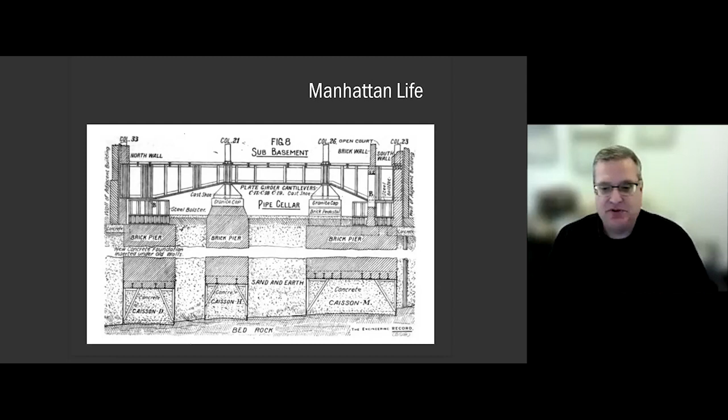So while there are certainly a lot of differences, and I think that between the two of us we've covered them, that issue is the same in both cases, that you have to have, back to Baumann again, the idea of having isolated foundations to have separate loads and equalize the bearing pressure. It's particularly important when you have different loads on different parts of the building. And even if Chicago tended to build blocky buildings without towers, they still had things like firewalls, light courts. So the load varied from one side of the building to another.

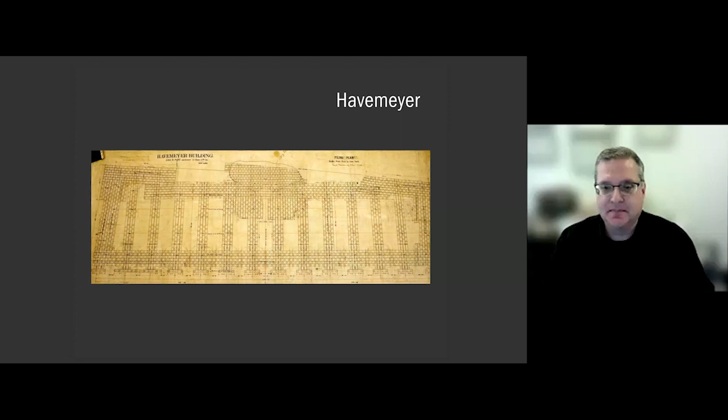That's inevitable. And you have to have a way of dealing with it, either by having separate footings so that you can have equal bearing pressure, and therefore, in theory, equal amounts of settlement, or going to rock and you don't have any settlement. And I think I'm done.

So I will be very briefly introducing Jared Green, who you can see here with his earpieces on, looking very professional, because he is in fact a professional geotechnical engineer who works in the Philadelphia office of Langan, who specialize especially in foundations, tunnels, and such underground things. He works from the Philadelphia office, but on New York and the metropolitan area, also Pennsylvania and New Jersey.

Jared was suggested by Don Friedman, who is a colleague who has worked with him on many projects. So we took Don's advice, and we are turning it over to Jared to pose questions, both from a historical perspective, but also from his contemporary experience and his work on historical buildings, and I suppose the removal of historical buildings in some cases for the new ones that replace them. So Jared, please take it over.

All right, great. Thank you, Carol. Thank you, Tom. Thank you, Don. I've been following both of you for some time. I've got your books here, and it was great to hear your thoughts regarding foundations. I'd say that as a geotechnical engineer, I appreciated hearing what you had to say.